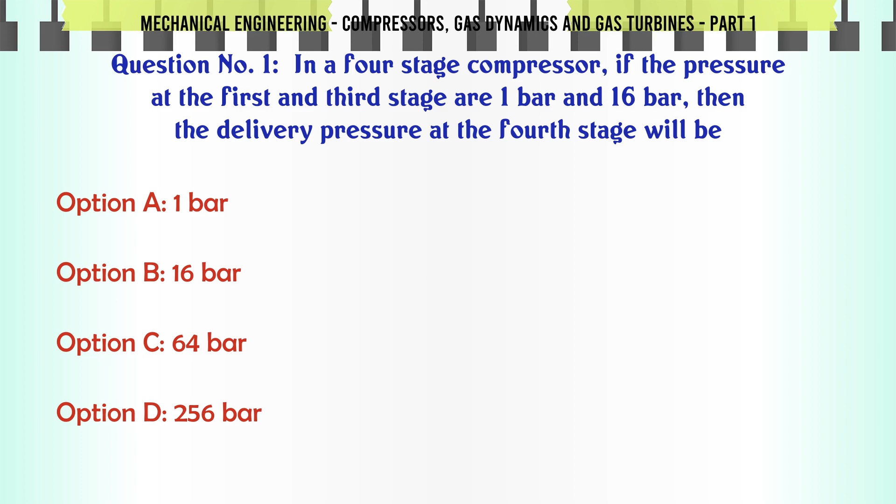In a 4-stage compressor, if the pressure at the first and third stage are 1 bar and 16 bar, then the delivery pressure at the fourth stage will be: A) 1 bar, B) 16 bar, C) 64 bar, D) 256 bar. The correct answer is 64 bar.

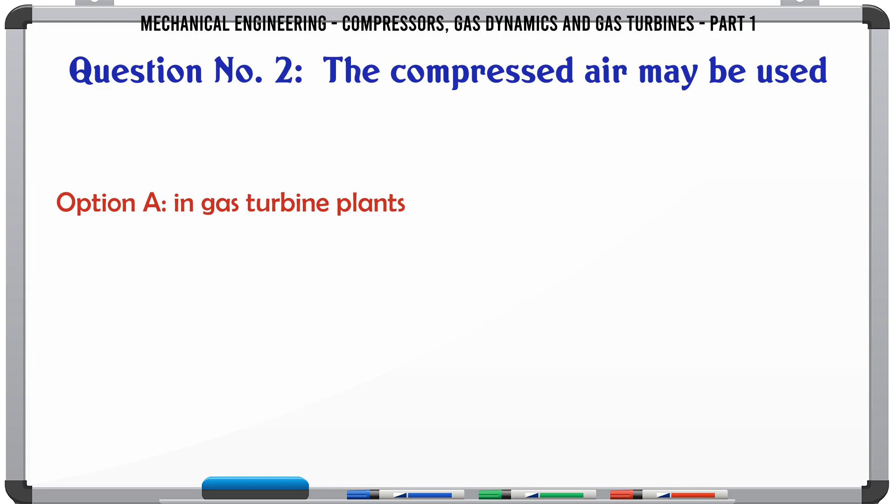The compressed air may be used: A) in gas turbine plants, B) for operating pneumatic drills, C) in starting and supercharging of IC engines, D) all of the above. The correct answer is all of the above.

The volumetric efficiency for reciprocating air compressors is about: A) 10 to 40, B) 40 to 60, C) 60 to 70, D) 70 to 90. The correct answer is 70 to 90.

The maximum temperature in a gas turbine is: A) 200°C, B) 500°C, C) 700°C, D) 1000°C. The correct answer is 700°C.

The rotary compressors are suitable for large discharge of air at low pressure: A) true, B) false. The correct answer is true.

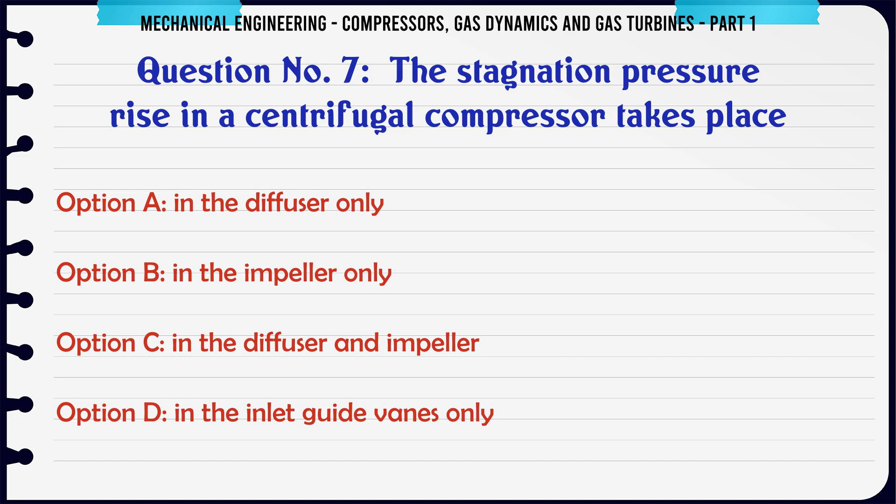The stagnation pressure rise in a centrifugal compressor takes place: A) in the diffuser only, B) in the impeller only, C) in the diffuser and impeller, D) in the inlet guide vanes only. The correct answer is in the diffuser and impeller.

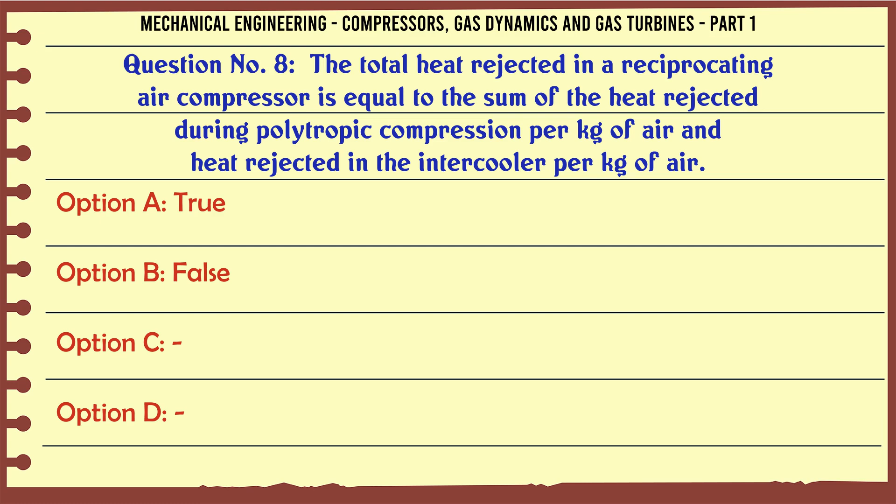The total heat rejected in a reciprocating air compressor is equal to the sum of the heat rejected during polytropic compression per kg of air and heat rejected in the intercooler per kg of air: A) true, B) false. The correct answer is true.

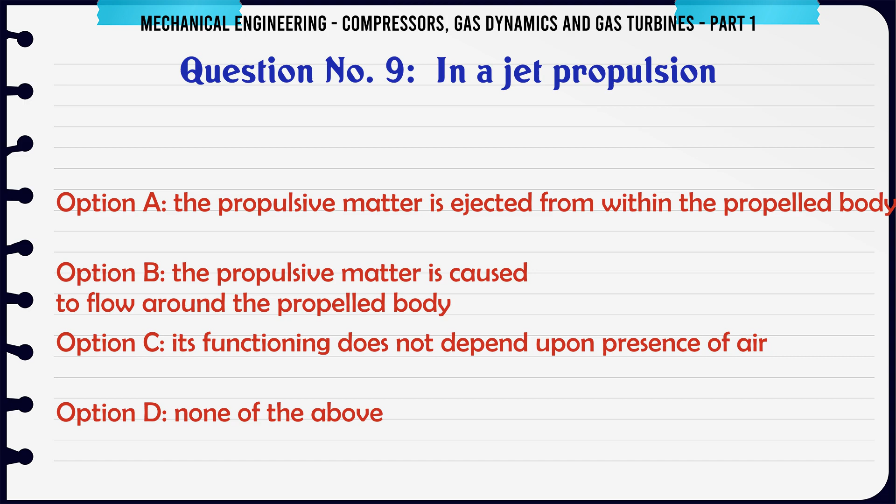In a jet propulsion: A) the propulsive matter is ejected from within the propelled body, B) the propulsive matter is caused to flow around the propelled body, C) its functioning does not depend upon presence of air, D) none of the above. The correct answer is the propulsive matter is ejected from within the propelled body.

An open cycle gas turbine works on the same cycle as that of a closed cycle gas turbine: A) Yes, B) No. The correct answer is yes.

Which of the following statement is wrong? A) In a 2-stage reciprocating air compressor with complete intercooling, maximum work is saved. B) The minimum work required for a 2-stage reciprocating air compressor is double the work required for each stage. C) The ratio of the volume of free air delivery per stroke to the swept volume of the piston is called volumetric efficiency. D) None of the above. The correct answer is none of the above.

In a single-acting reciprocating compressor, the suction, compression and delivery of air takes place in how many strokes of the piston? A) 1 stroke, B) 2 strokes, C) 3 strokes, D) 4 strokes. The correct answer is 2 strokes.

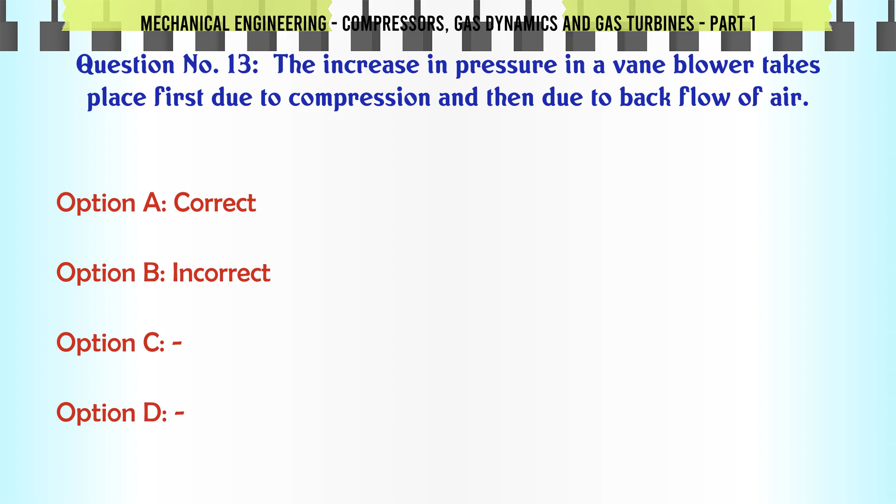The increase in pressure in a vane blower takes place first due to compression and then due to backflow of air: A) Correct, B) Incorrect. The correct answer is correct.

The maximum delivery pressure in a rotary air compressor is: A) 10 bar, B) 20 bar, C) 30 bar, D) 50 bar. The correct answer is 10 bar.

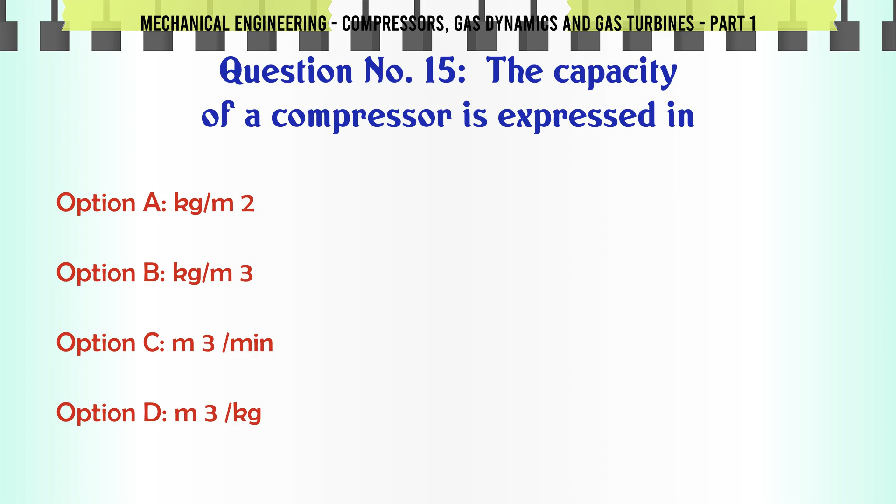The capacity of a compressor is expressed in: A) kg/m2, B) kg/m3, C) m3/min, D) m3/kg. The correct answer is m3/min.

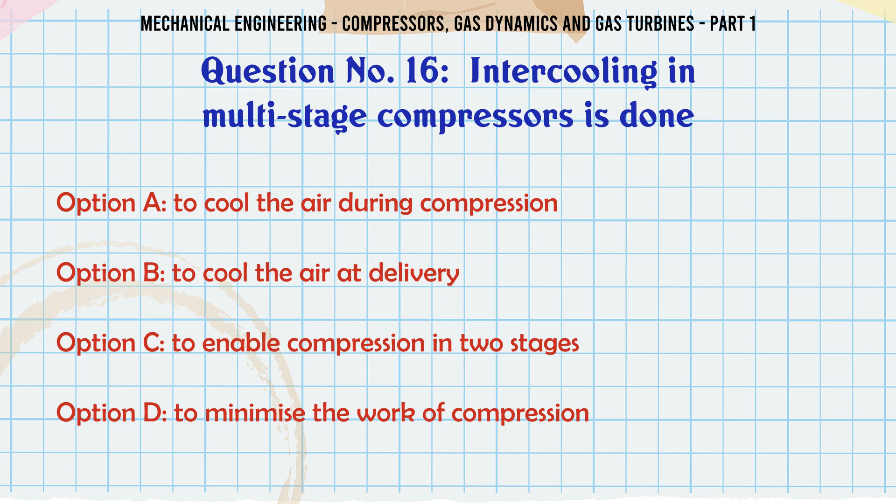Intercooling in multi-stage compressors is done: A) to cool the air during compression, B) to cool the air at delivery, C) to enable compression in 2 stages, D) to minimize the work of compression. The correct answer is to minimize the work of compression.

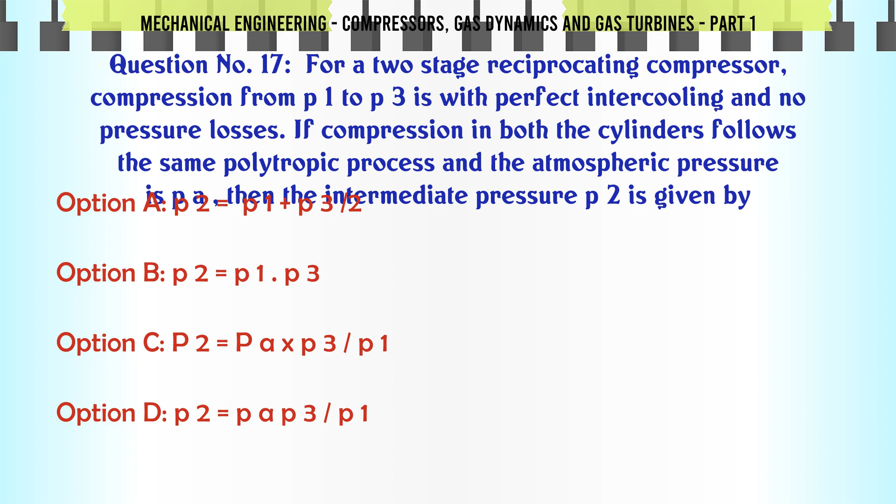For a 2-stage reciprocating compressor, compression from P1 to P3 is with perfect intercooling and no pressure losses. If compression in both the cylinders follows the same polytropic process and the atmospheric pressure is Pa, then the intermediate pressure P2 is given by: A) P2 = (P1 + P3)/2, B) P2 = sqrt(P1 x P3), C) P2 = Pa x P3/P1, D) P2 = Pa x P3/P1. The correct answer is P2 = sqrt(P1 x P3).

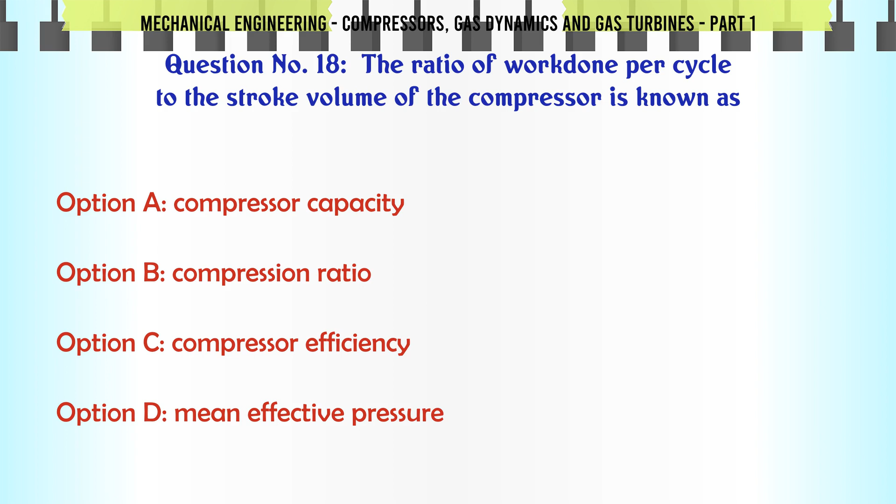The ratio of work done per cycle to the stroke volume of the compressor is known as: A) Compressor capacity, B) Compression ratio, C) Compressor efficiency, D) Mean effective pressure. The correct answer is mean effective pressure.

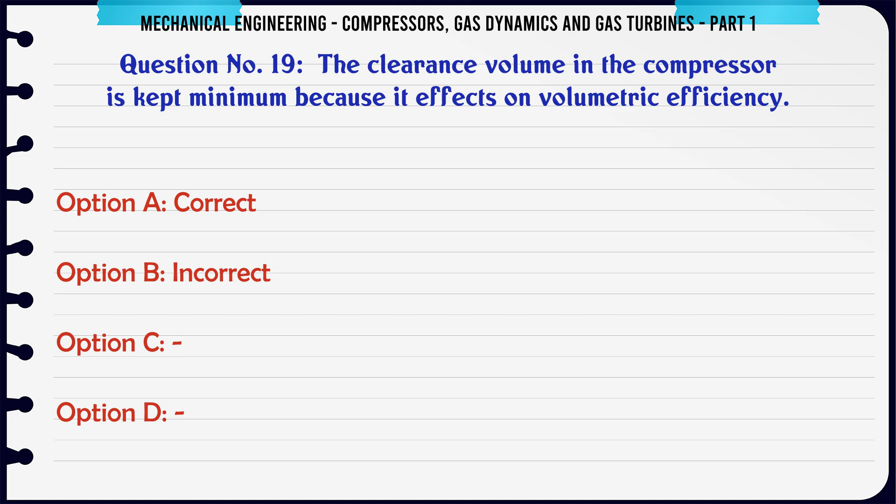The clearance volume in the compressor is kept minimum because it affects the volumetric efficiency: A) Correct, B) Incorrect. The correct answer is correct.

The inlet pressure is always the discharge pressure: A) equal to, B) less than, C) more than. The correct answer is less than.

Which of the following statement is correct? A) The ratio of the discharge pressure to the inlet pressure of air is called compressor efficiency. B) The compression ratio for the compressor is always greater than unity. C) The compressor capacity is the ratio of work done per cycle to the stroke volume. D) During isothermal compression of air, the work done in a compressor is maximum. The correct answer is the compression ratio for the compressor is always greater than unity.

The type of rotary compressor used in gas turbines is of: A) Centrifugal type, B) Axial flow type, C) Radial flow type, D) None of these. The correct answer is axial flow type.

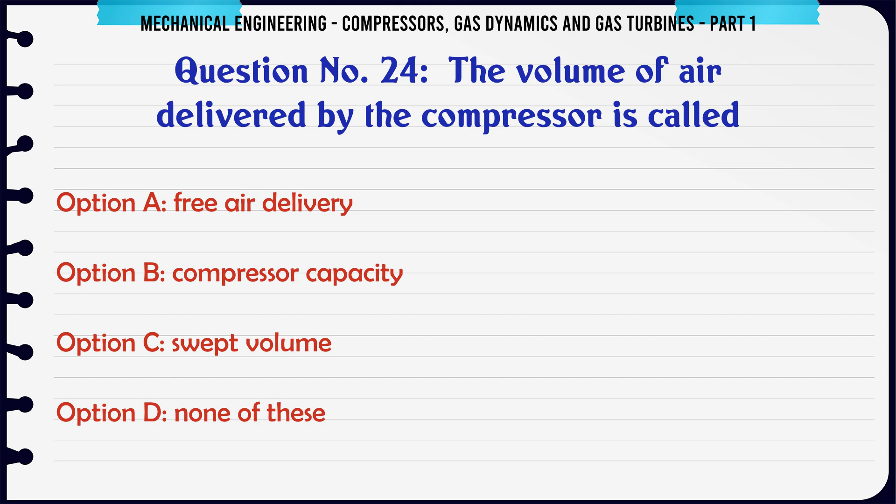The volume of air delivered by the compressor is called: A) Free air delivery, B) Compressor capacity, C) Swept volume, D) None of these. The correct answer is compressor capacity.

The efficiency of a jet engine is higher at: A) Low speeds, B) High speeds, C) Low altitudes, D) ...

High altitudes. The correct answer is high altitudes.

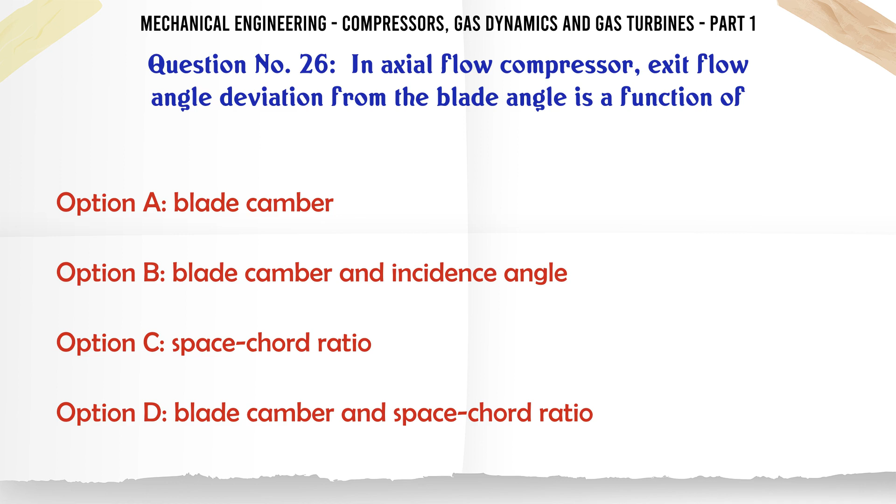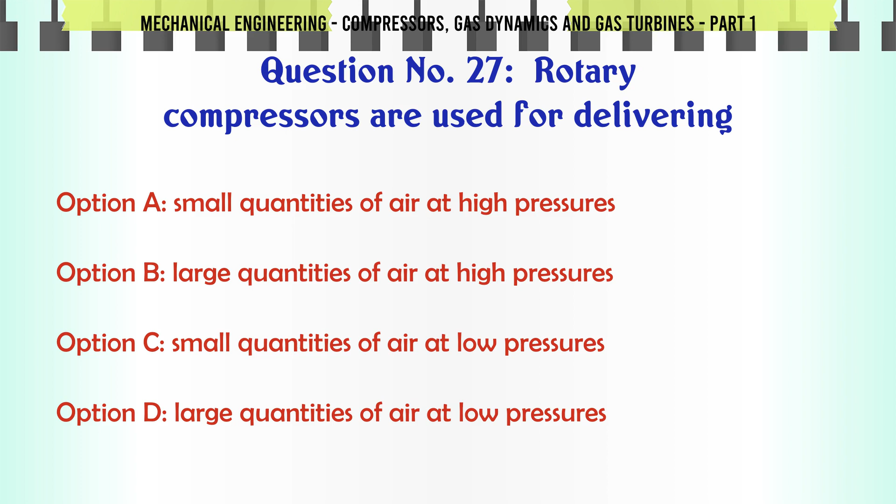Rotary compressors are used for delivering: A. Small quantities of air at high pressures, B. Large quantities of air at high pressures, C. Small quantities of air at low pressures, D. Large quantities of air at low pressures. The correct answer is large quantities of air at low pressures.

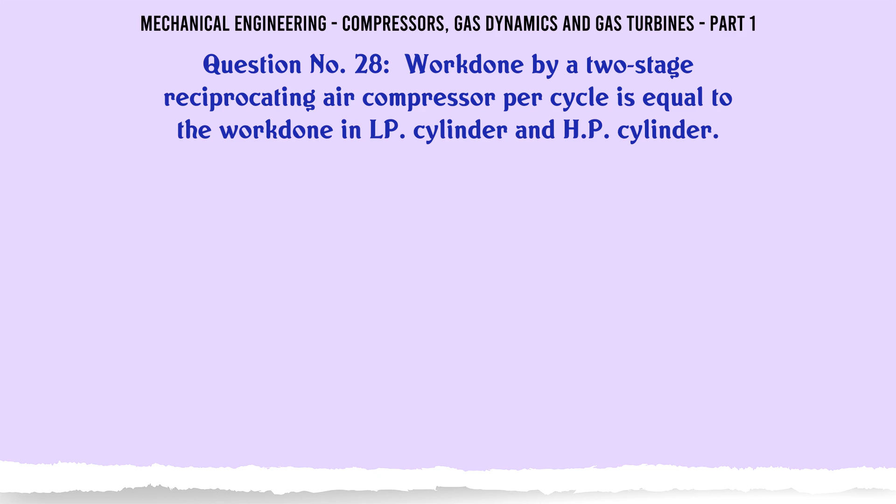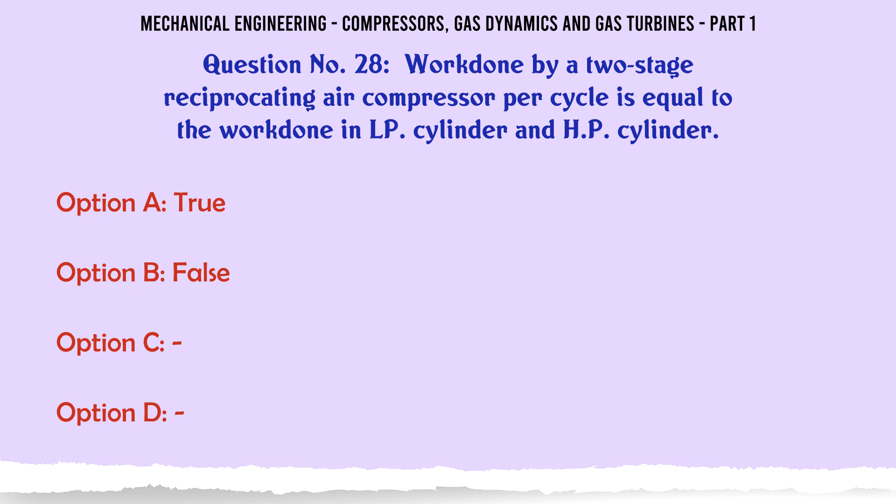Work done by a 2-stage reciprocating air compressor per cycle is equal to the work done in LP cylinder and HP cylinder. A. True, B. False. The correct answer is true.

A rotary compressor is driven by: A. Electric motor, B. Engine, C. Either A or B, D. None of these. The correct answer is either A or B.

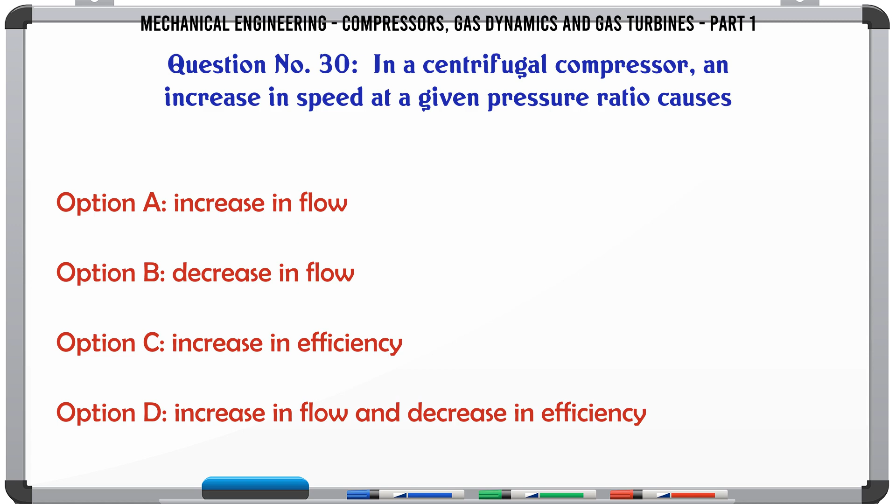In a centrifugal compressor, an increase in speed at a given pressure ratio causes: A. Increase in flow, B. Decrease in flow, C. Increase in efficiency, D. Increase in flow and decrease in efficiency. The correct answer is increase in flow and decrease in efficiency.

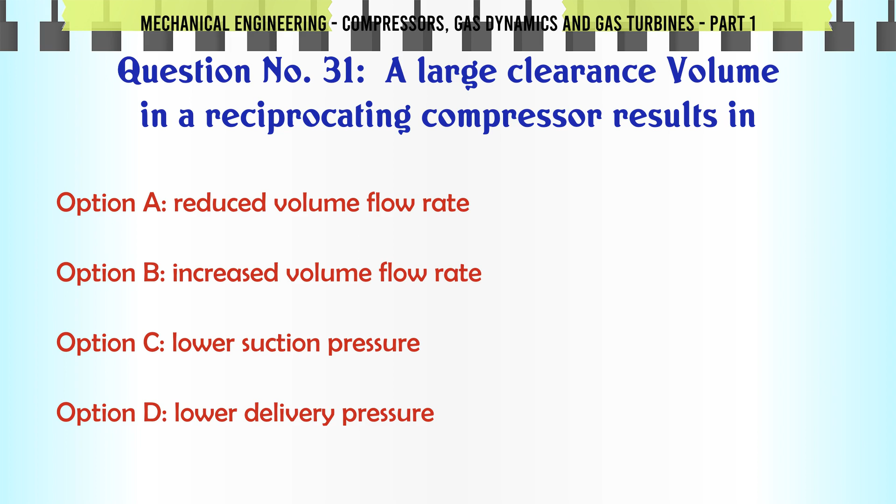A large clearance volume in a reciprocating compressor results in: A. Reduced volume flow rate, B. Increased volume flow rate, C. Lower suction pressure, D. Lower delivery pressure. The correct answer is reduced volume flow rate.

A closed-cycle gas turbine gives efficiency as compared to an open-cycle gas turbine: A. Same, B. Lower, C. Higher. The correct answer is higher.

Gas turbine as compared to steam turbine: A. Requires less space for installation, B. Has compressor and combustion chamber, C. Has less efficiency, D. All of these. The correct answer is all of these.

Intercooling in gas turbines: A. Decreases net output but increases thermal efficiency, B. Increases net output but decreases thermal efficiency, C. Decreases net output and thermal efficiency both, D. Increases net output and thermal efficiency both. The correct answer is increases net output but decreases thermal efficiency.

When the temperature of air leaving the intercooler in a two-stage compression with intercooler is the original atmospheric air temperature, then the intercooling is known as perfect or complete intercooling: A. Equal to, B. Less than, C. More than. The correct answer is equal to.

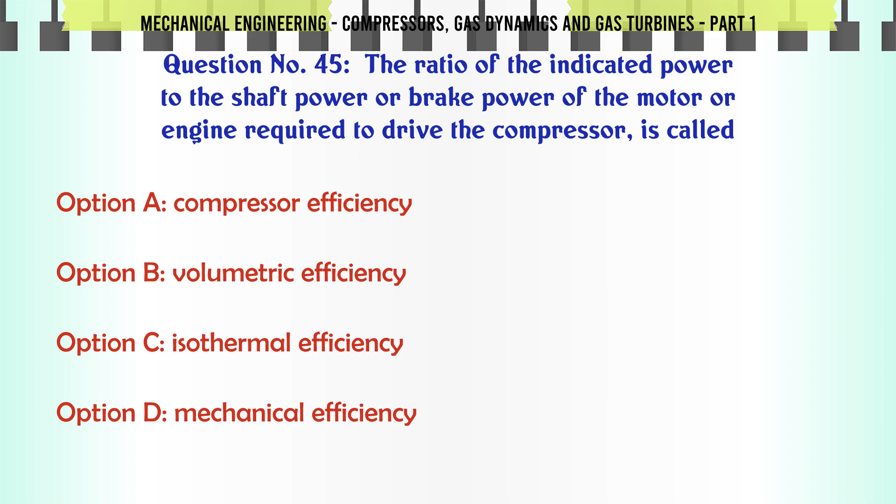The ratio of the indicated power to the shaft power or brake power of the motor or engine required to drive the compressor is called: A. Compressor efficiency, B. Volumetric efficiency, C. Isothermal efficiency, D. Mechanical efficiency. The correct answer is mechanical efficiency.

The increase in pressure in a Roots blower is entirely due to backflow of air. A. Agree, B. Disagree. The correct answer is agree.

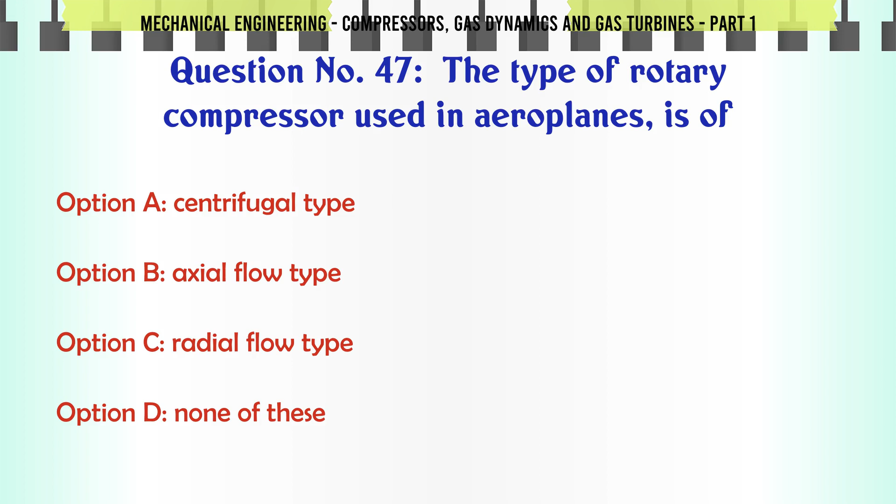The type of rotary compressor used in aeroplanes is of: A. Centrifugal type, B. Axial flow type, C. Radial flow type, D. None of these. The correct answer is axial flow type.

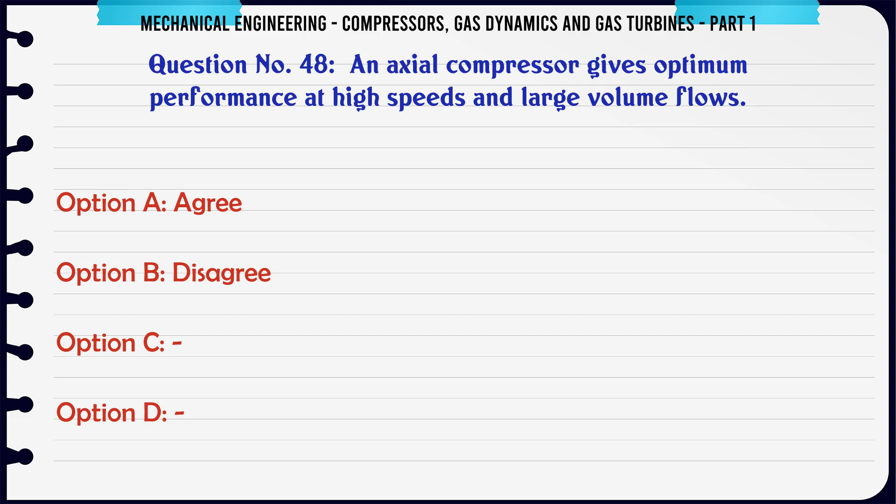An axial compressor gives optimum performance at high speeds and large volume flows. A. Agree, B. Disagree. The correct answer is agree.

In a reciprocating air compressor, the compression work per kg of air: A. increases as clearance volume increases, B. decreases as clearance volume increases, C. is independent of clearance volume, D. increases as clearance volume decreases. The correct answer is independent of clearance volume.

The degree of reaction in an axial flow compressor is defined as the ratio of static enthalpy rise in the: A. rotor to static enthalpy rise in the stator, B. stator to static enthalpy rise in the rotor, C. rotor to static enthalpy rise in the stage, D. stator to static enthalpy rise in the stage. The correct answer is rotor to static enthalpy rise in the stage.